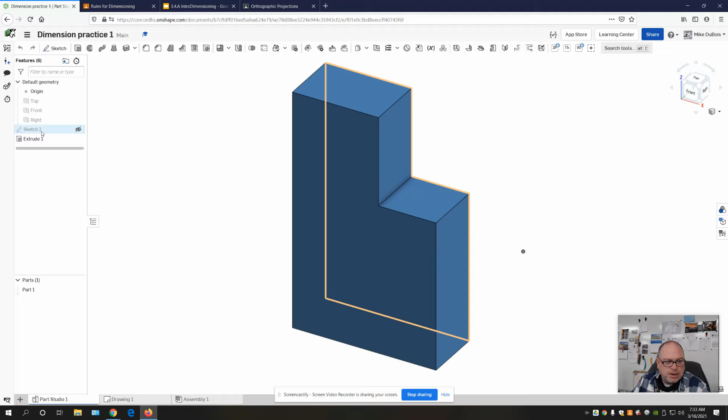So let's start with this. The way you want to do this is go back through and look at the actual sketch, and it's going to give you the dimensions. You can toggle between the two. What I'd probably do is take a snapshot of the sketch, then go over and start dimensioning it. It's entirely up to you however you want to do it. You could have your Chromebook out if you're here at school and do it that way.

Anyway, I'll go through the process. I'm not going to go through the rules so much, well, I will as we go, but I'm just showing you. I always start with the smaller dimensions first, like this 1.5 and this 1, and then I usually do the overall ones. So start with the smaller ones and work your way out. We'll do this 1.5 and this 2.5.

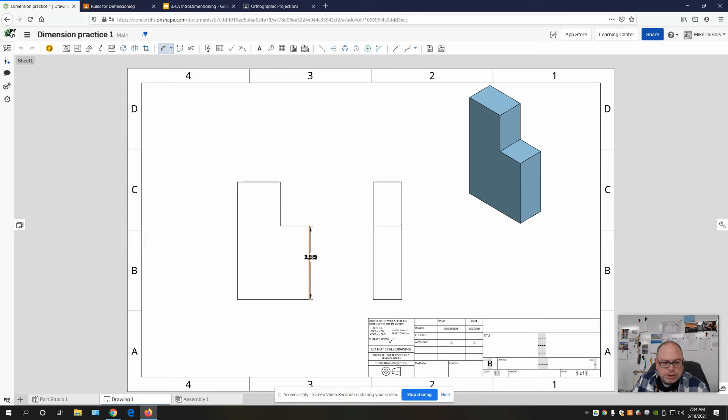So putting those dimensions in, we'll do the 2.5. As far as how far you bring it out, just make it look good, something like that. Then we can put this dimension in here. There's a couple ways you could do this. I could go from this point to this line and it'll give me that. But now I don't want to see this dimension looking like this. You always want the arrows on the inside, that's always a better thing, instead of having this on the outside.

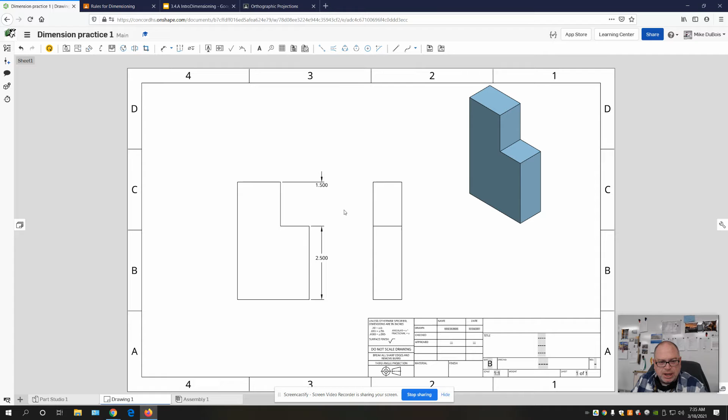But let's say you accidentally do that, you put it on the inside or outside like that. What you can do, I'll zoom in here, is come in and you see this little diamond, you can flip it so the arrows go on the inside. Then you can recenter this because we always want this centered, then go back and redo that. You always want to try to have it centered if you can, that's the best thing.

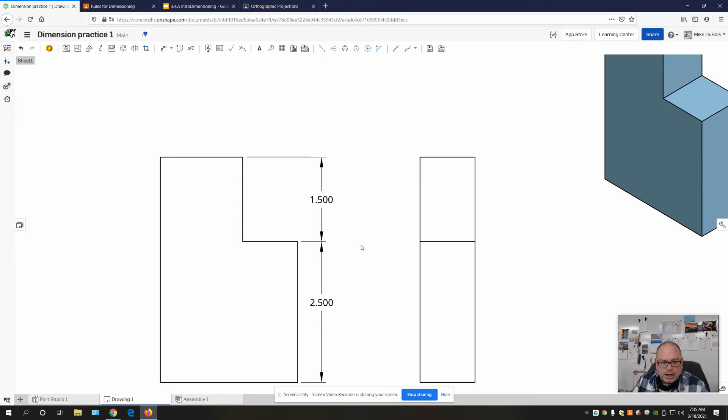Now let's go ahead and do that one dimension, basically this right here. Again you see how you can do that, but you want it on the inside. Now I click that line, but I want to show you something: it should always leave a gap right here. See that? See how it leaves a gap? So if I just click this line, it's not going to give me a gap there, right there.

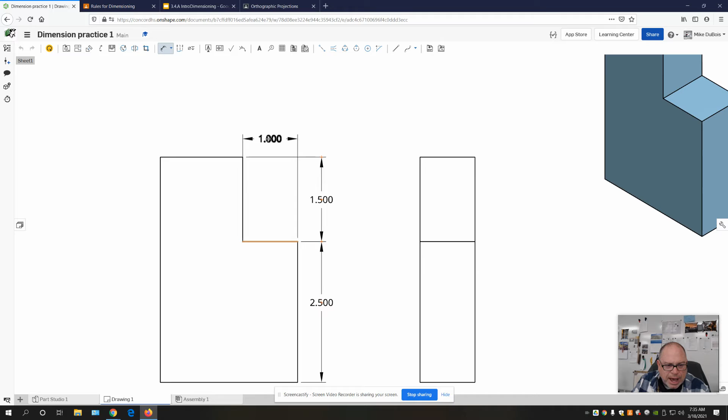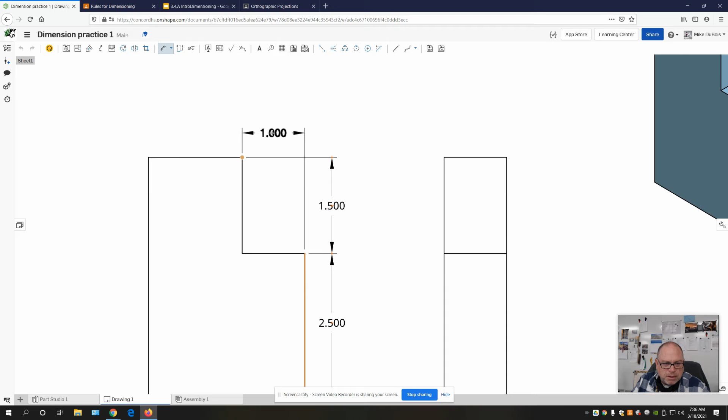That's why when I did this one, I used this point here and that line instead. So in this case I would dimension this by clicking this point and then this line right here. See how it gives you the gap right there now. And try to get this centered, it kind of locks in as far as how far, just about right there.

So always try, when you do your dimensions, to have that little gap there. That means you might have to go to the point, or you could do it another way. I could have done dimension and clicked this line and this line, and it would give me the one. So there's a couple ways to do that. You always want the dimension on the inside.

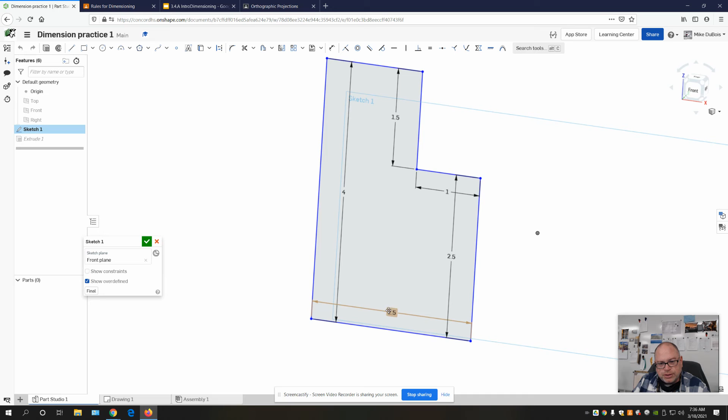So then the next, I'll go back here. Looks like I need the 4 and this 2.5. Let's get that, let's do the overall height. Now your rules always state you want to try to have the dimensions between the views, like this, and if we had a top view up here, you'd want it here. So we're going to do the overall height here.

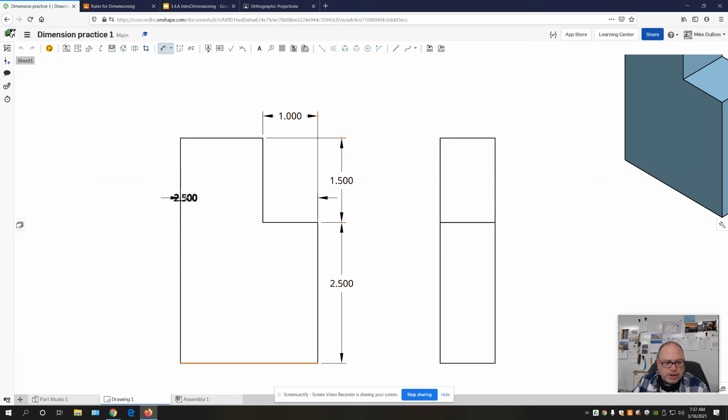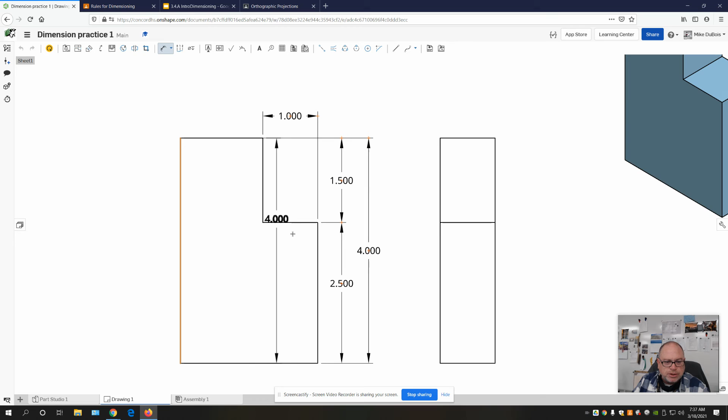So I could have done this whole line and put the dimension out here, but I'm going to just dimension from that line to this line, which will give me that 4 inches. Notice as you move it, it snaps into the middle. Now you don't want these really far out, so you want them kind of close together like this. Then we need this dimension here, so again I'll go from here to there and put that in the middle.

And notice, if you look at all these dimensions, they all have that spacing in there. You always want that little space in between. We call this the extension line, and these are dimension lines. Dimension lines actually have the dimension, the size. Now these type of dimensions are what we call size dimensions, they're sizing it, giving it the size. So these are different sizes.

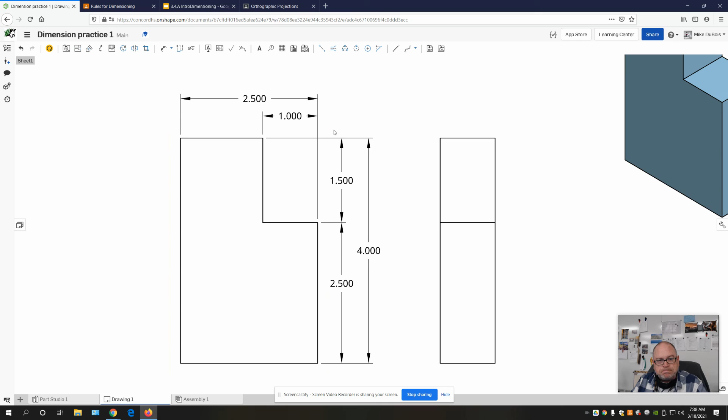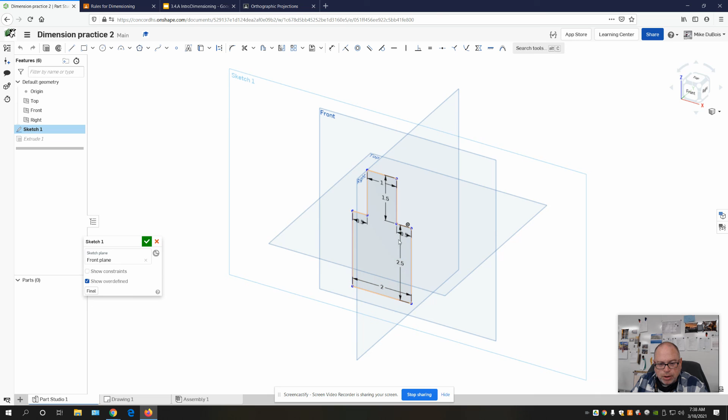So what I want you to do then is go through, and I'll have to delete this because I don't want you guys to have this. So you do that with me, you can do it right along with me, pause me, do whatever. Then you're going to do number 2 on your own, using the same rules of what I did there. But what you'll do is go back into Part Studio and check out that sketch, it's got all the dimensions in there, and all those dimensions have to be on this drawing. Good luck.